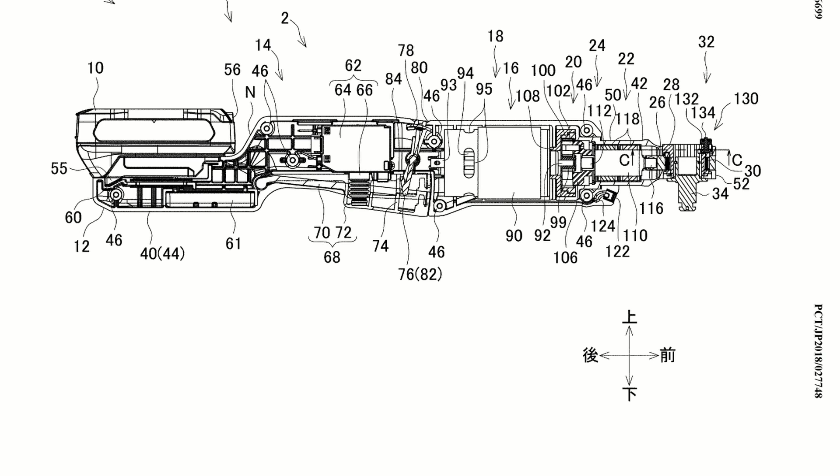First up is 12-volt CXT ratchets. These are going to be developed to compete with Milwaukee's 12-volt system. Makita doesn't have any ratchets out yet. They have some right angle drills, impact drivers, and impact wrenches, but this is their first foray into ratchets, which you can use like a hand tool or with the powered 12-volt drive. The battery connects flat out of the way, so you don't have it sticking down past where you want to get to if you're trying to get into a tight spot.

Next up is a cordless mag drill. This is going to be for heavy-duty steel drilling applications. The only other cordless one I know of right now is Milwaukee, so it's great to see some competition in the market coming from Makita. This one's going to run on their 18-volt platform, and it's going to be an X2 design.

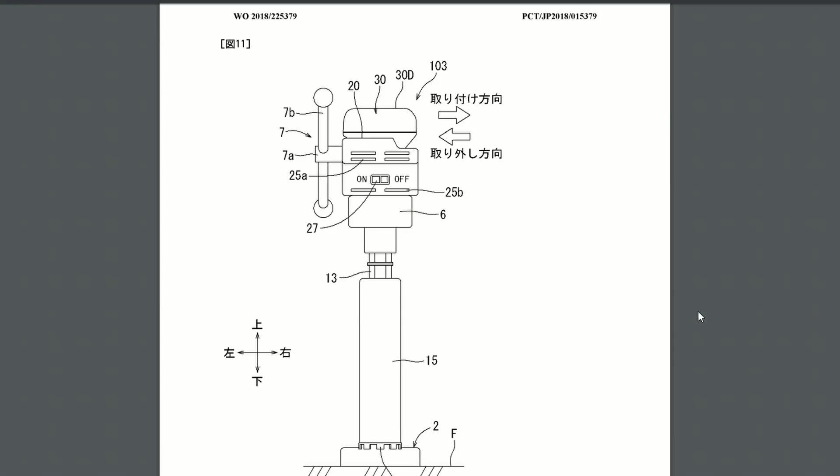Next up is a cordless rivet tool. This is an 18-volt design, so I'm betting it's going to be able to handle up to a 1/4-inch stainless steel rivets. The only other 2 cordless rivet tools I know of from major manufacturers are from Milwaukee and Metabo, so it looks like Makita's really going after specialty application tools with the patents that I've found.

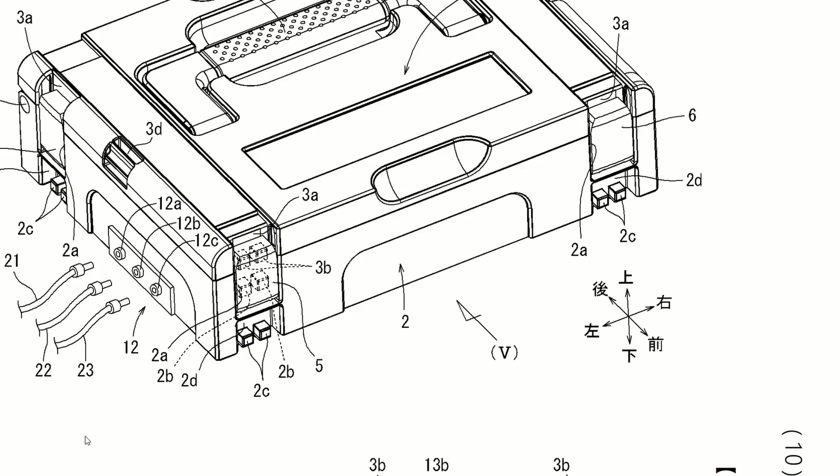This one's a 10 battery power supply that fits into one of their stacking toolboxes. The idea behind this is you can throw a bunch of batteries in there and have multiple voltage outputs for a tool with an adapter, so you don't have to hold the tool or keep switching out batteries if it's a high draw tool. They list 5 volts for USB, 10.8 volts for their 12-volt max tools, 18 volts and 36 volts for their X2 tools.

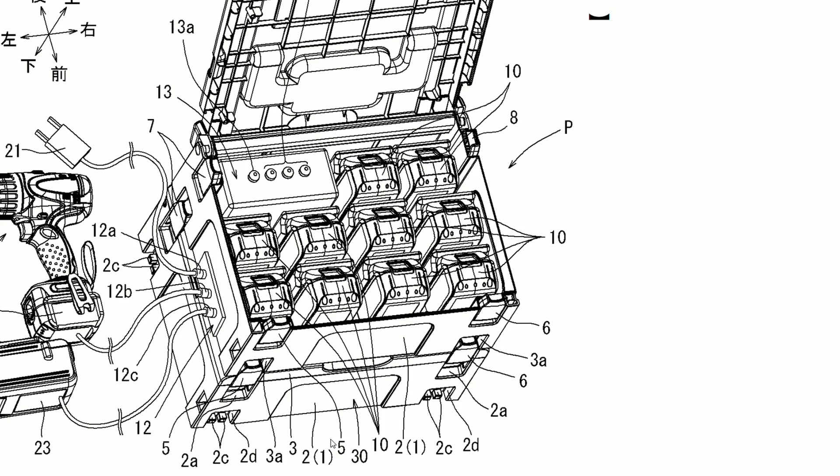This is also a charger that you can plug into the wall and will charge all 10 batteries inside. Unfortunately, I didn't see anything about whether this can supply an inverter AC power supply to a corded tool, so hopefully that's in the works too, but I was a little bit disappointed I didn't see that option.

So everyone knows Makita already has cordless coffee makers. They're on their 2nd gen of those. What else do you need on the job site though? If you've got hot coffee, you might want a hot lunch too, right? They've got a cordless microwave design. They've got options out there for a single battery kit or an X2 version. This thing integrates with their locking stacking toolboxes, so you can carry it around on a dolly without having to hold the whole thing by the top handle and lug it around.

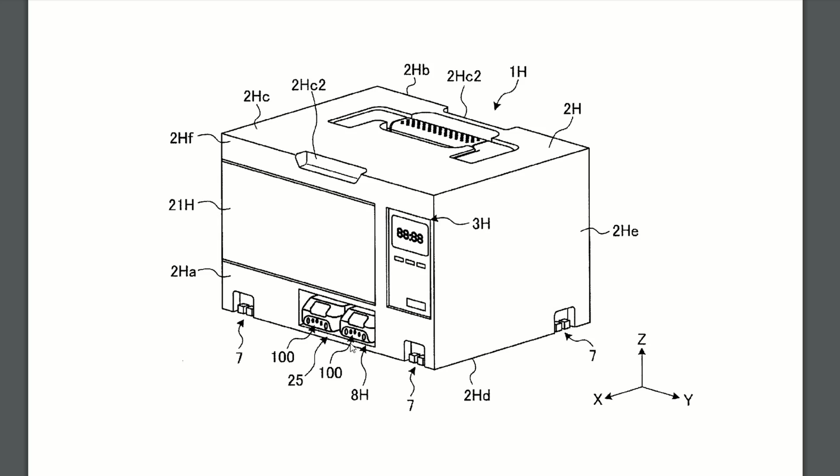Now I did some math on this. A single 5 amp hour battery like this one is 90 watt hours for 18 volts. If you do a regular old 700 watt microwave, that's about as low power as they get for a cheap one, you're looking at roughly 7.7 minutes of runtime, which might be enough to heat up 2 meals.

This next one I'm just going to call a power glove and hope Nintendo doesn't get mad. I'm seeing a theme of Makita working on ergonomics, trying to take weight off of the tool side. So this is designed to put a battery on a clip or maybe in a backpack and have a glove with electrical contacts on it, so when you pick up the tool, it is energized.

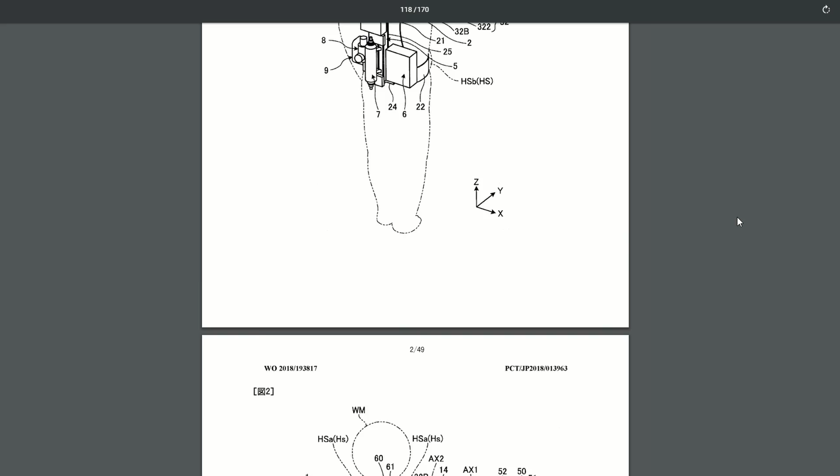I saved the best for last. This one is a powered exoskeleton that runs off of 18-volt batteries. They've got a few different design ideas outlined in this patent, but it's basically something you wear on your back and helps you move your arm upwards when you're working overhead with a power tool. So once again, Makita is working on ergonomics of keeping their workers from tiring out.

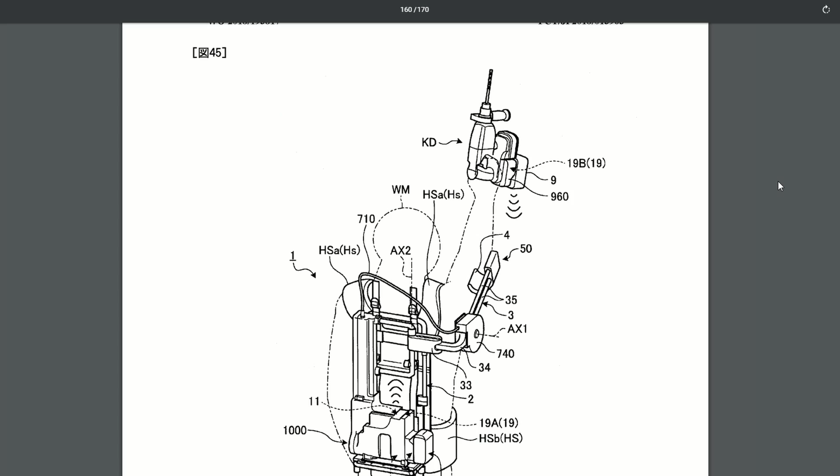If you've got a heavy tool, like an SDS hammer drill that you're drilling into concrete overhead, or maybe you're using a reciprocating saw or something, whenever the tool is triggered on, the suit will help you hold it up and push against whatever you're cutting or drilling into. They've got a few different options, including a wired option that triggers in when that tool is turned on, as well as Bluetooth enabled like they do for their dust extractors.

So that's everything I found that was really interesting of Makita's. Let me know if you're looking forward to any of these, what you think about them, and if you've got your own wish list you'd like to hear about from Makita. So remember, these are just patent applications. There's no guarantee Makita's going to come out with these tools, but it does give us a good snapshot into what they're putting their R&D efforts towards.